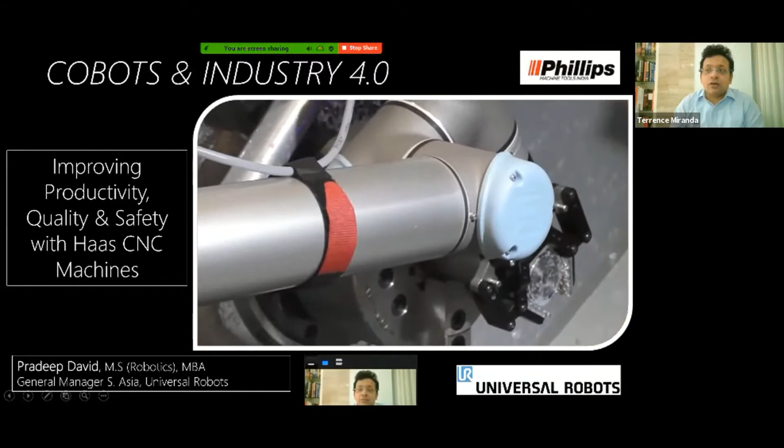Today, more than ever before, it's all about the competitive edge. Phillips, through our automation division, and Universal Robots, through their path-breaking collaborative robot technology, have come together in the Indian market to provide cost-effective, flexible, and safe automation solutions for a wide range of CNC machine tending tasks. As we all know, the present pandemic has revolutionized the manner in which CNC machining is looked at globally. India is certainly no exception. Machine shops worldwide are looking at innovative ways to automate and simplify processes. This is exactly what Cobots do, and Universal Robots exemplifies this. Simplify, automate, work collaboratively with CNC machine operators to increase efficiency and promote workplace safety. This is really the big difference today.

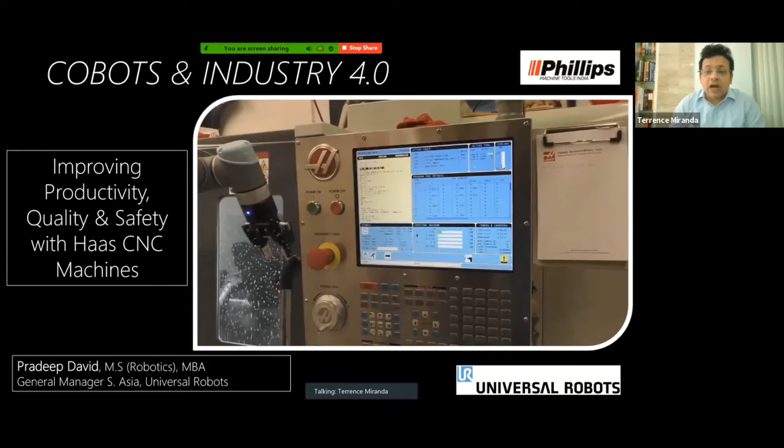Cobots put the power of automation and customization in the hands of the customer, just like the introduction of CNC did several years ago. We will now play a brief introductory video to Haas in India, the way our customers see us, and we will then proceed to the informative and technical UR presentation by Pradeep David. Thank you.

Haas has played an important role in achieving our goals. We are now confident and we can deliver the components to our customers with a tolerance accuracy of less than 10 microns. Haas gives us that edge over others to meet the requirements of the customer on time, every time. With the help of the Haas machines, we have been able to achieve the accuracy level of 10 microns.

Every successful industry needs a trustworthy partner, and for us, Haas is one of them. Anyone can sell you a machine, but I've never seen a company so committed to training you on it and ensuring that you're running it properly as Haas. We want a trusted partner in terms of who will take care of our machining requirements, and that is how we have been connected with Haas. We are very happy with Haas machines, and thank you so much for supporting us as a good partner.

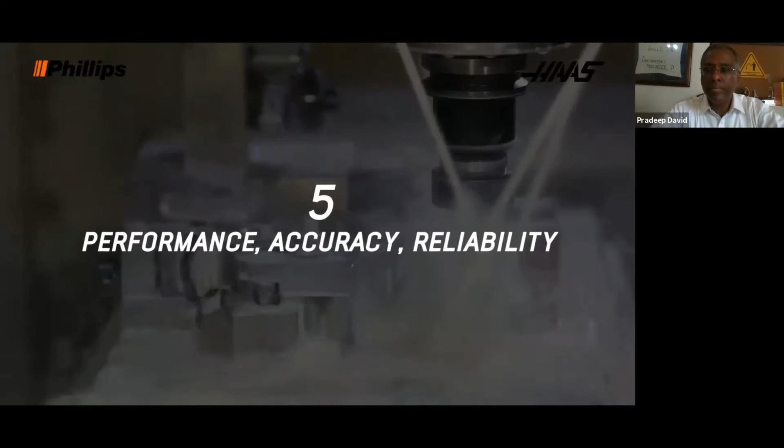On Haas machines, we cut titanium material and PEEK material, which is usually very hard to cut, but on Haas, we don't face any problems. One of the things we've seen is that Haas is a pretty reliable machine to run even these small cutters. It runs pretty smooth, we don't have quality issues, and it just shows you the integral build of the machine itself is very good.

Even I'm surprised that for an application which is as crucial, as critical, and as tough as graphite, we could run the machine for almost 10 years without any major repairs or refurbishment. Life, as well as the consistency and minimum maintenance breakdown, is the main characteristic of the machine tools.

Haas machines come up with very innovative ideas. The other good thing about Haas is that they have not stopped innovating. They have always worked on better equipment, better feed rates, better spindle designs, integral spindles now. So that has really helped us increase our productivity over the years. One more aspect about Haas is that you can even add a robot to run the machine. They are offering auto door opening facility anytime in the future as per your requirement.

We bought the Haas machines because of very good quality to price ratio. Considering the performance and cost wise, we came to the conclusion that Haas machines are better machines.

Haas is being instrumental in producing good quality products for OEM.

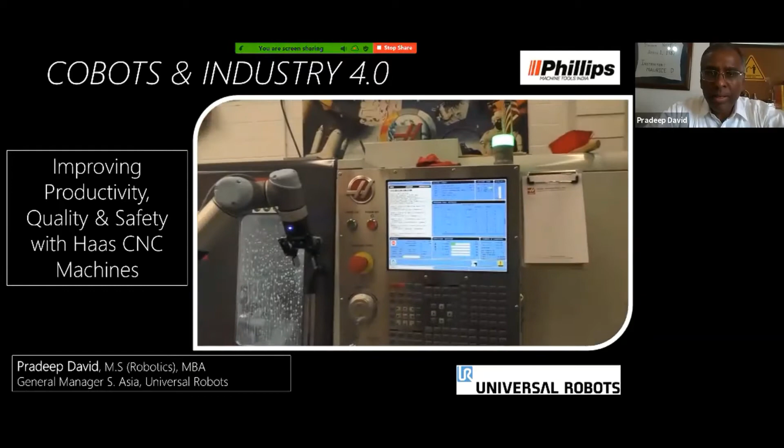So I think you see from this inauguration screen what we're all about. This is nothing but a human arm which can load and unload your parts very accurately. We have about 10,000 of these devices around the globe on machine tending applications, in other words, loading and unloading CNC machines. So by far, our number one application.

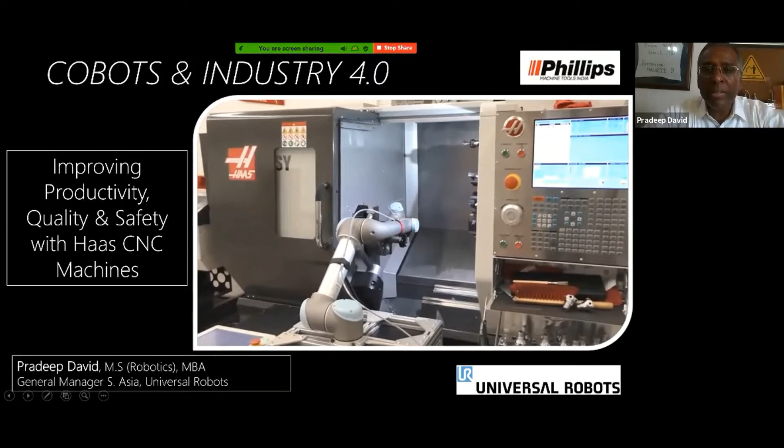Universal Robots is a Danish company. I represent the India operations. We've been here since 2016, that's when we started in India. The company itself is about 10 years old, and we are the leaders.

Now, since COVID is the big topic of today, let's just get that out of the way. While we talk about machine tending, it's also important to understand that what we have here is just an arm. Imagine it like a human arm, or your operator had a third arm. What could it do? In Singapore, they've used this arm with a dispensing machine, and it goes around a hospital spraying and keeping it clean. In Denmark, you see it's actually doing throat swabs. Instead of having a human being, and this guy potentially COVID infected coughing into the face of the doctor, we have actual tactile feedback at the end of this arm, and it can very delicately go and pick up the sample from the back of your throat.

And so that's another example. Some people are using it with a UV wand and an AGV, so it can actually be put on a mobile device. Let's say a particular workstation, or a factory had a COVID attack, one particular operator had COVID. Now what do you do? We see that in many factories in India now, I'm hearing in Gurgaon some large factories have got COVID infections, we've seen it in the newspaper with Bajaj, for example. So you would send a device like this with a UV wand, and it would actually sanitize that entire place without any human contact.

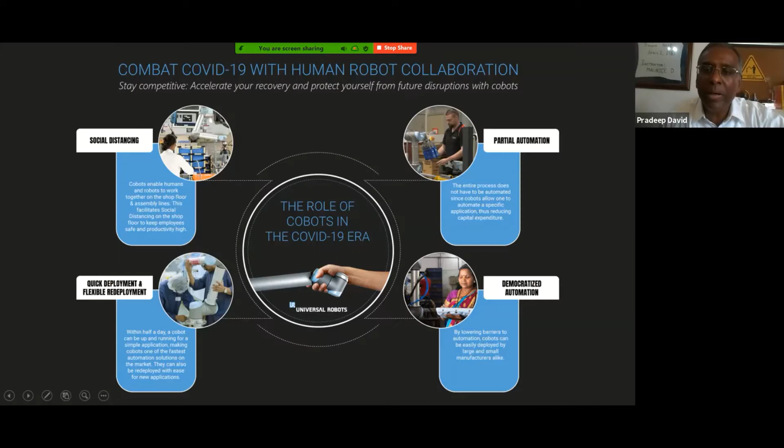Democratized automation. You look at the lady who's now programming the Cobot. This happens to be in Pune. And she doesn't look like a robot programmer or anything like that, right? She's just a regular operator on the shop floor. So the concept here is, if you know how to program your cell phone, you know how to do WhatsApp, and just about every Indian is an expert in WhatsApp today, right? So we can teach that person how to program a collaborative robot. I'm going to show you an example today as we go along.

Finally, there's a concept of partial automation. You notice that a human being and a robot are working close together, there's no fencing. In this case, it's bottling. And I know you're all CNC manufacturers, CNC users, so this may not be relevant to you, but think about it. I don't have to put a fence around it. So if I've got space limitations in my factory, notice that the human and robot can work safely right next to each other. These are some of the value propositions.

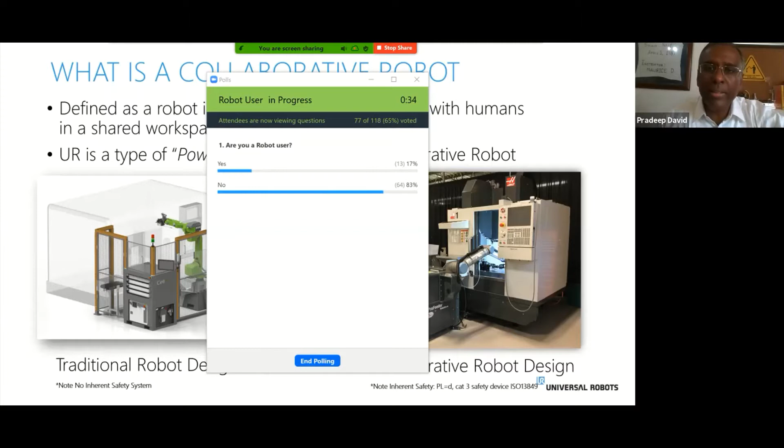So it says actually that 17% are users of robots. So today you probably use robots. My general impression of this would be that you're using industrial robots, not Cobots, because Cobots are fairly new. And a whopping 83%, okay, so let's say 80-20, the 80-20 rule has worked in this poll. 80% are not using robots or Cobots. So it's a great session you're attending. Hopefully we'll be able to help those who are not using Cobots and see how this can be valuable to you. Okay, moving on to the next slide.

So once again, industrial robot on the left, collaborative robot on the right. Very similar to the previous picture. You notice there's a huge fence around this. So once again, if you happen to be an SME or MSME, most probably your shop floor space is limited. You do not have the luxury of putting a big fence around every robot, every machine, and using up that space. Okay, space is very expensive in India, and it's prime, right?

However, you notice the Cobot like this, put on a little trolley. He moves it from one CNC machine to another, and so let's say that particular Haas machine today, you've got a huge amount of orders. I can move the Cobot to that machine and load and unload. And maybe at the end of this week, I'm done with the orders on that machine, but I need to move it to a different machine. I just take it on this trolley, put a little locating pin on the floor, and choose the right program, and I'm off and running, okay?

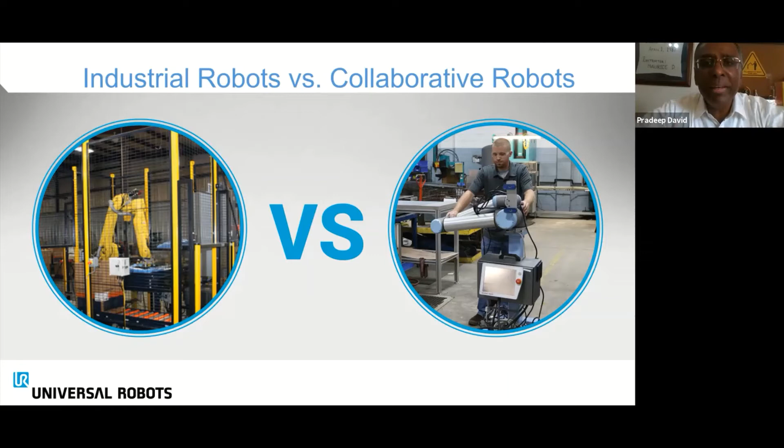Think of a Cobot as a tool. Please don't get this mind block that, I'm putting in a robot, how the heck am I going to maintain it, my people are very simple. No problem, you can maintain it, and I'll show you how.

If you're interested in the technical specification, it's about a book that thick - you can go online, ISO technical specification 15066, 2016. That's when it was ratified, which basically allows a Cobot and a human to work together in the same space. I won't go through the details, it's very thick, but if you're interested it's all there. 17 safety functions, EN ISO 13849, category 3 PLD, certified by TUV Nord.

So many of you I know have export orders, and your customers require you to have certain levels of automation, right? I know Bosch, for example - we have an MSME in Pune supplying parts to Bosch, and Bosch has said you better get Industry 4.0 ready, and I want you using things like Cobots which are Industry 4.0 compliant, to show that you're meeting the required standards for automation in the future. Keep your plants future ready.

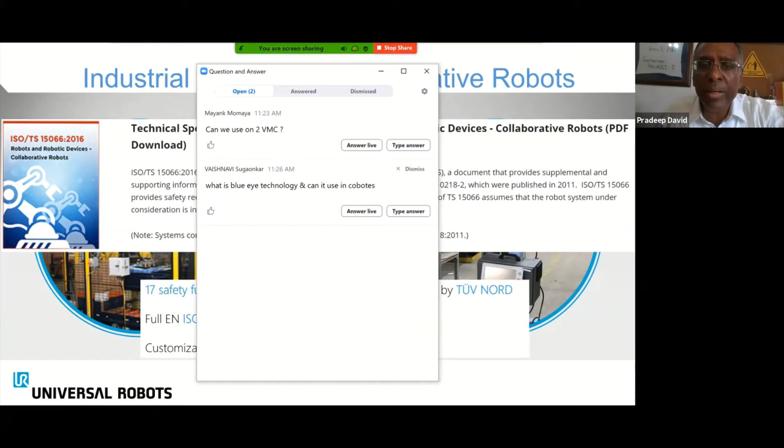What is Blue Eye technology and can it be used in Cobots? I'm not very familiar, sir, with what you're asking about Blue Eye technology. If you don't mind detailing that - maybe I said something and you caught it as Blue Eye, but I'm not 100% sure what you're asking. Anyway, feel free to keep asking your questions, Akash, who's online, will also be able to answer them as we go along.

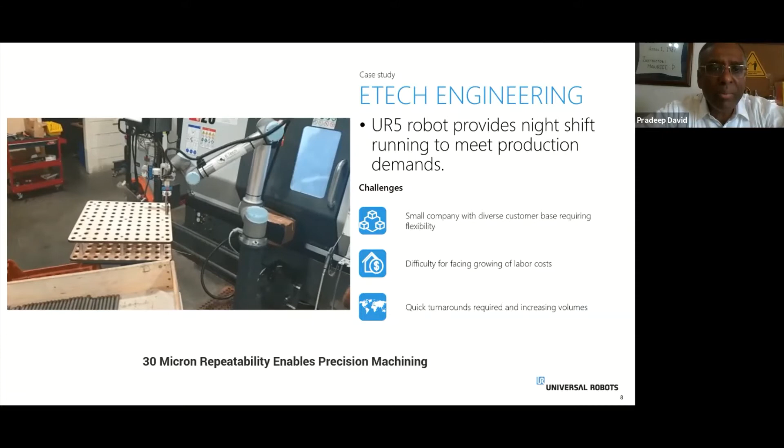So we have a Haas machine, we have a robot, a Cobot rather, collaborative robot. It's got these parts - it's going to the input tray, picking up, it looks like some kind of pipe and/or bar metal stock, something like that. And it's putting it on that machine. Not sure what it's doing there, but gauging or something is happening there.

Then it's coming to the Haas machine and waiting for the door to open, and now it loads the machine into the chuck. By the way, 30 micron accuracy is possible with a UR5E - I'll explain these categories shortly. And why is there a Y-shaped, why are there 2 grippers? Because one gripper is pulling out the part that's machined and the other gripper is actually loading the part. So you save a little bit of time, right, your cycle time is enhanced. That's why you have two grippers.

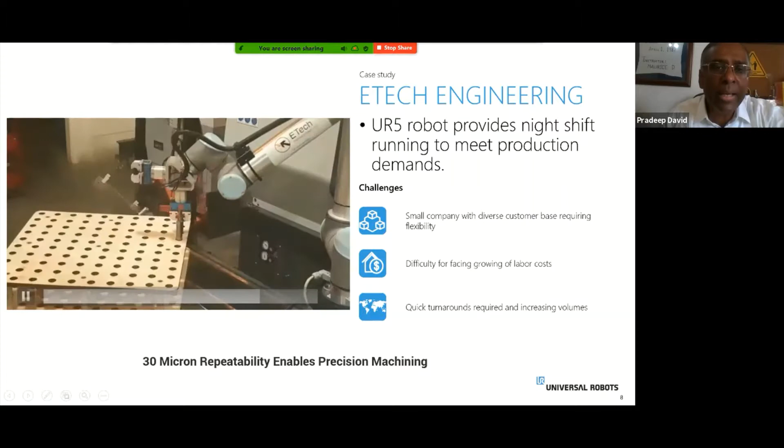Okay, so once again, it's picking up that stock, putting it to that gauging station or whatever station that is - some operation is happening there. And it now brings it to the Haas machine.

And there it goes. It puts in the raw stock, pulls out the robot, and starts the machine. This is done by E-Tech Engineering, using a UR5. In this case, it's 100 micron accuracy, not 30 micron.

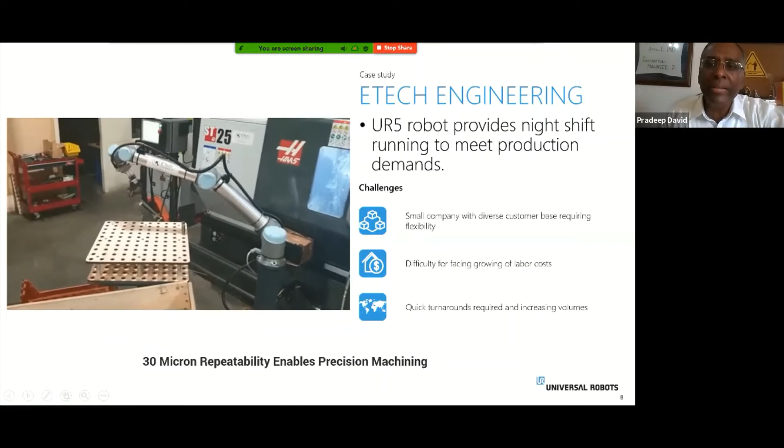30 micron is with a UR5E. Just to be clear, this is my mistake, but a UR5 will give you 100 micron repeatability, whereas a UR5E will give you 30 micron accuracy.

So they had a problem with night shift running, maybe you also have this problem. You don't have operators at night, so you can come fill up the input tray, and this machine is going to be making parts right through the night. When you come in the morning, your output tray is all filled, and you can start filling this tray up for the Cobot once again.

So, a small company with a diverse customer base requiring flexibility, and difficulty facing growing labor costs. In fact, I would say unavailability of skilled labor nowadays. In our situation, a lot of labor has gone home and God knows when they'll come back. Quick turnarounds required and increased volume. These were the kind of things we were addressing at this particular customer location. Simple case study. We'll take a look at a few more as we go along.

Many of you, I see 100+ people have attended, so maybe you've read articles in the press about a silent Cobot revolution brewing in Indian workshops. Why is this happening? Why is this technology so popular? Let's try and understand that.

So let's take a look at this particular video at Ahmedabad.

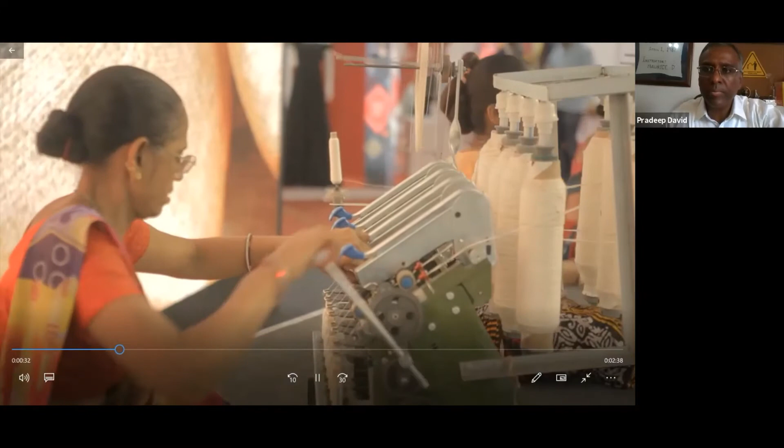Welcome to Ahmedabad, India's fastest growing city. This small city is home to some of India's biggest textile manufacturers, an industry established here as early as the 19th century. The entrepreneurship talent here was able to bring mechanized manufacturing almost 140 years ago. I am Ashish Nagarsheth, Managing Director with SMEW Textile Machinery Private Limited. We are a textile machine manufacturer based in Ahmedabad, India. SMEW was started in 1958 and it's been our family business since then. We make textile winding machines. Our main product is the soft package winding machine, the rewinding machine, and some customized machines for winding as well. We've gone from MSME to SME, a small and medium scale enterprise, from a micro scale enterprise.

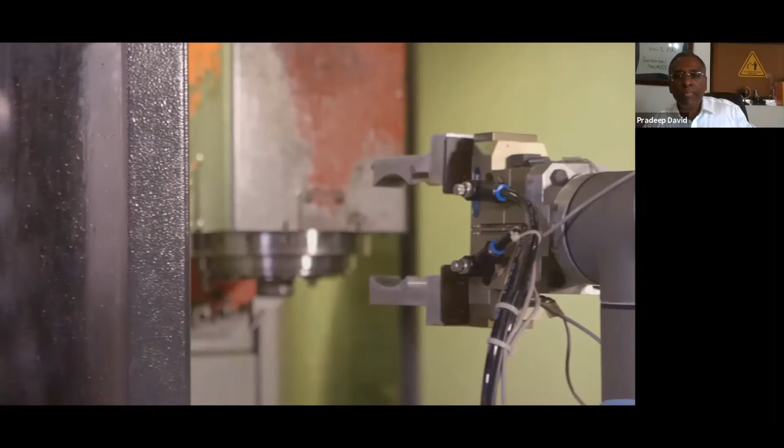In January 2017, SMEW Machinery decided to purchase and deploy the UR10 Cobot by Universal Robots. A universal robot with its simplicity and non-fencing requirement met our requirements specifically for this machine. The UR10 robot is basically... our operators find it very easy to use, as far as operator friendliness is concerned.

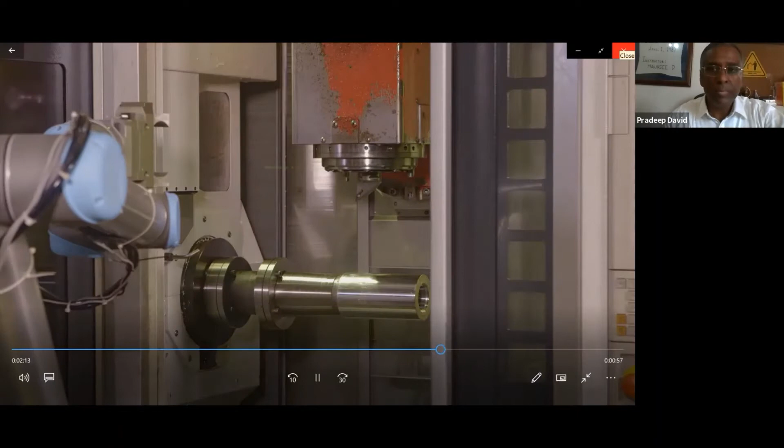The advantage with this application for us is that we are able to run the machine for much longer hours than we would using human labor. Before the robot was installed, we were making about 30 pieces a week. Now we are able to go from 30 pieces to almost 80 to 90 pieces per week, a jump of almost 3 times. It's been very good for us because the return on investment is less than 12 months. We hope to have a long-term relationship with Universal Robots and look forward to investing in more robots in the future, working along with them together.

Just like Ashish at SMEW Machinery, many more small and medium-scale enterprises are choosing Universal Robots Cobots as an affordable solution to take their operations to the next big milestone.

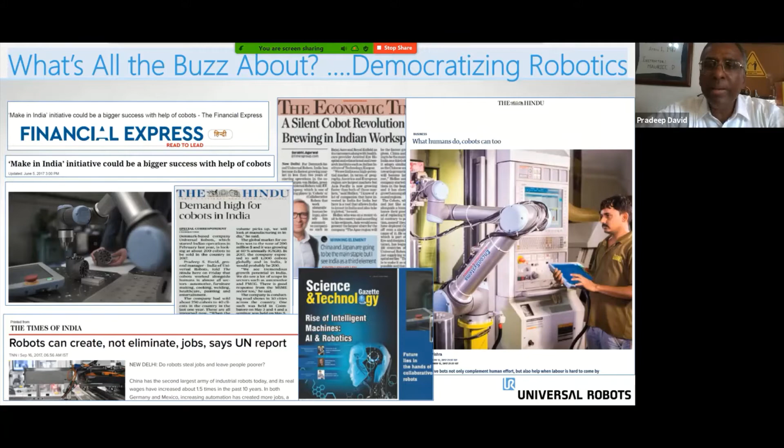So I think you saw a very happy MSME user there that is not so dependent on his operators anymore. One important point here is this is a study done by Frost and Sullivan. The reason you're attending this seminar is obviously to get more new technology into your plants. You've all heard of 5G, AI, and deep learning. But in advanced manufacturing, you're all in manufacturing, you've got CNC machines, Haas machines — automation is the way to go.

We'll show you the benefits now of cobots. Number one, it is Industry 4.0 compliant. So if you are supplying to a large MNC or you're exporting, I'm sure your end user, your customer, is going to insist on Industry 4.0 compliance in your manufacturing.

I'm not going to go through the definition of Industry 4.0, it's a very large definition with 26 different levers. But the important one we're going to focus on is human-robot collaboration. It's important enough in the definition of Industry 4.0 to have its own category. People understand that humans and robots, when they work together, give you a huge new capability that just humans alone or just robots alone never could give you.

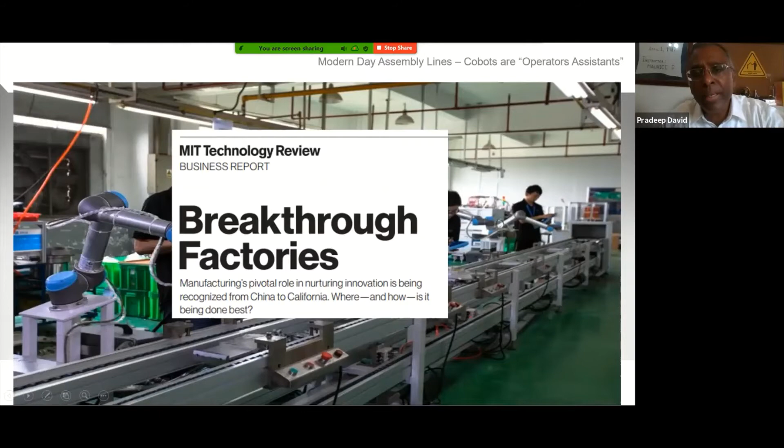There's a study done by MIT, the Massachusetts Institute of Technology in Boston. This is not a marketing gimmick, it's a technical study done by a very well-reputed global university. The experiment was done at a BMW factory in the US, and the result was they found an 85% reduction in workers' idle time when they collaborate with robots. So people found a dramatic improvement in productivity when humans and robots work together, as opposed to humans alone or robots alone. This was a huge finding, and we are now seeing the benefits of that.

So let's take a look at the benefits you get with a collaborative robot. Number one, you just plug it into the wall, single phase power like I have in my house right now. It's self-maintenance, I don't really need somebody coming in and changing the oil. There's no oil to change, right?

There's no grease to change, because I know 20% of you who have robots probably have an AMC from the robot company coming in and changing the oil or the grease, recalibrating, changing the battery. There's no such maintenance required.

Yes, there is self-maintenance required. In other words, I need to clean it down. If there's a lot of oil mist on this, I need to wipe it down. There's a control box, if there's a fan on there and it gets clogged, you're not going to get cooling. So make sure these kinds of very basic self-maintenance tasks are done. I want to make sure the mounting bolts haven't gotten loose, either on the end of arm tooling or the robot itself.

It's very easy to program, in less than half an hour you can get it programmed. I'll show you how. Every axis, this is a 6th degree of freedom like a human arm - you've got the base joint that moves, the shoulder, the elbow, and the 3 axes at the end, the wrist if you would. Each axis can go plus or minus 360 degrees. Go and check out an industrial robot spec, nobody will have this, where every axis can go plus or minus 360.

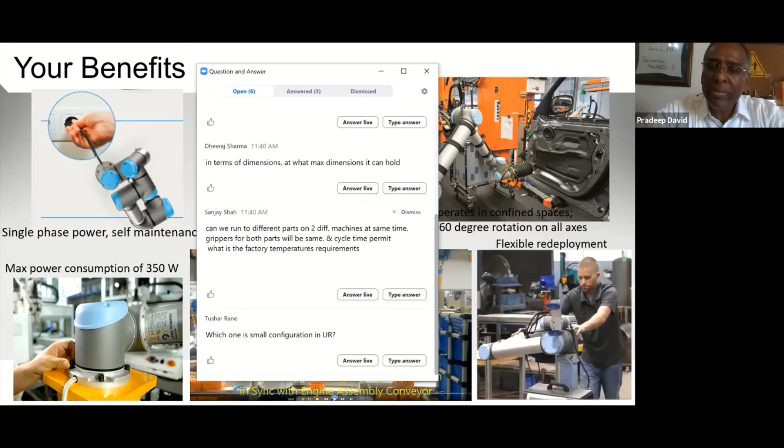When I say a robot is safe, a Cobot is safe, I've got all the technology built in so that if an operator accidentally comes into contact with it, it's not going to hurt him. I'm going to show you an example of that too.

However, what happens if you decide to put a knife in the hand of the robot? How safe is that going to be? Nobody's going to put a knife in the hand of the robot, but maybe your part has a lot of sharp edges. That's got nothing to do with the robot itself - maybe it's your part, or maybe it's your end effector tool, that could damage or hurt the operator.

In that case, we have certain tricks we can do, like pointing the wrist in an inward direction so the part is not exposed to the operator. So it's very important, when we say it's safe, to do a risk assessment of your entire application. Just because the Cobot itself is safe doesn't mean your application is safe - maybe you have a pinch point in your conveyor, we need to look into that. Maybe you have a point of collision with a sharp object, which could be tooling you're using elsewhere. So it's always important to assess the entire application, not just the Cobot alone.

So I hope I answered your question. It's not foolproof, but through a risk assessment of your project, we can make sure that it's totally safe. By the way, there's about

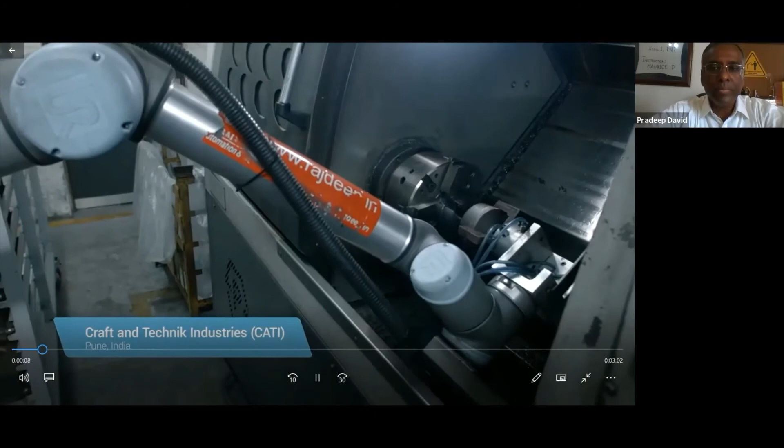I said to my father that I need some capital. He said, 'Why do you need money?' I said, 'I want to start a business.'

Craft and Technik Industries basically manufactures precision components, mainly for the automobile industry. And today in 2018, I'm proud to say that we are almost 70% export.

Overall in India, we talk about unemployment, but the true fact for the majority of the SME sector is that they don't get people. I can bring about 100 SME people who will tell the same thing.

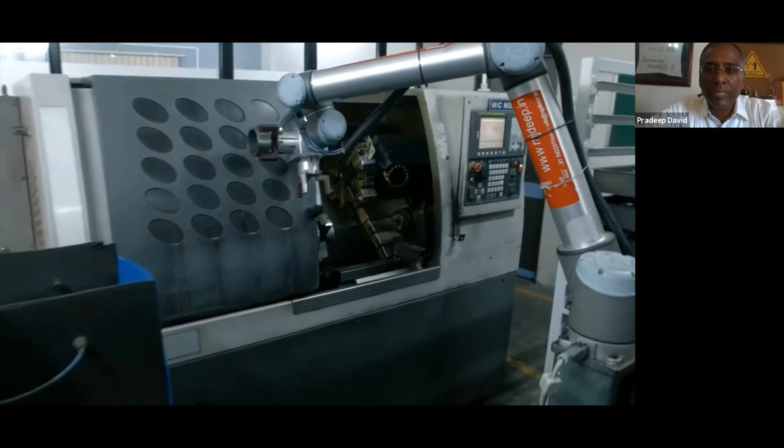So the best combination, I told them that we want to have robots. Instead of investing in 5 CNCs, invest in 4 CNCs and buy 1 robot. If not individually as a robot, but 4 machines and 1 robot put together as 5, the payback period will be faster. I visited Japan, where there are robots working at the same time on the assembly line.

Now the problem there is that the entire assembly line is fenced and nobody can get in. Collaborative robots was one very important point going ahead with Universal, because we have a lot of operators working on the shop floor and we did not want to seclude an area just because there was robotic operations there.

The components that we are manufacturing range from about a kg to maybe about 5 kgs in weight. And when I checked different robots available in the market, Universal Robot definitely topped that list. The UR10 could lift up to 10 kgs in weight.

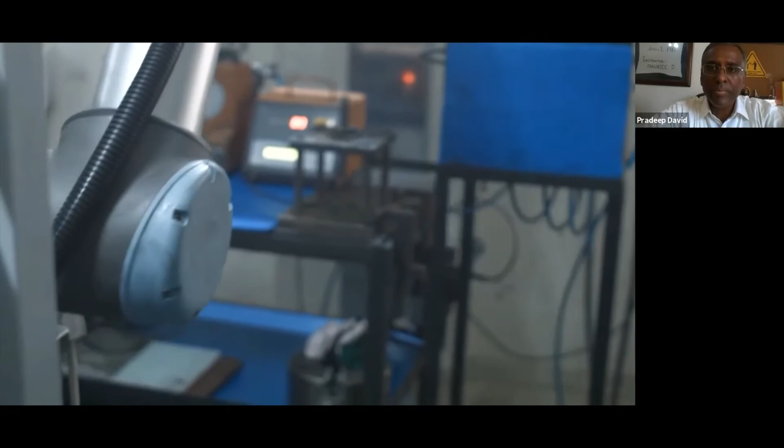The robot completes all of its auxiliary operations in the exact time that it requires for the second machine to finish its operations.

Initially, we got about 15% increase in production, and I'm pretty sure that we will be achieving 30% increase in production. We've introduced auto inspection on the robot.

So the robot actually places the component onto an inspection fixture, takes feedback from that fixture, and then decides whether the part is okay or not. So our customer is rest assured that none of the parts going to him are defective.

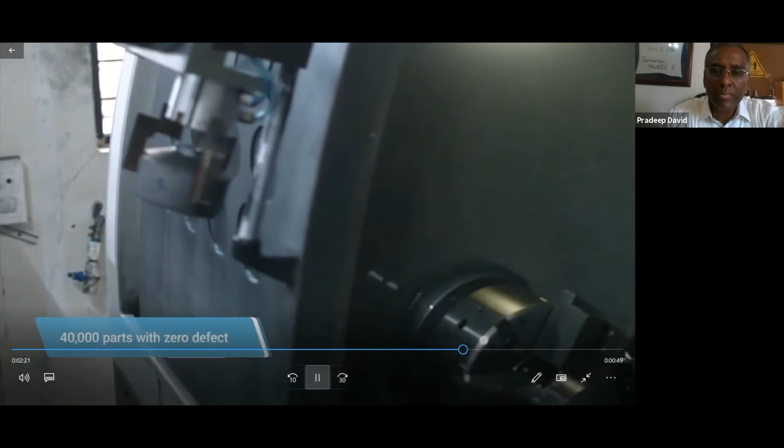Now 40,000 parts have been machined by the robot. Those 40,000 have already reached the customer. I have not faced any kind of rejections at the customer end.

I'll just stop the video for a second here. There was a question: can 2 VMCs be handled? So you see here, the Cobot is in the middle, mounted on a pedestal, and within reach of both sides it's got 2 machines. This is a very common application where we have 2 CNC machines being tended by 1 robot.

We need to have at least 10 robots. That is my foresight. I'm quite hopeful that we should be able to achieve that.

I would call on my fraternity of SMEs that, boss, come on, the time has come that SMEs should also be all automated. It's not the prerogative only of large scale industry that they have robots. Those who can afford to run VMCs and CNC lathes, they don't have to think about payback period.

Robot is just a block within your mind. You have to remove that block and take a decision and go ahead with investment. And it will definitely improve your operations.

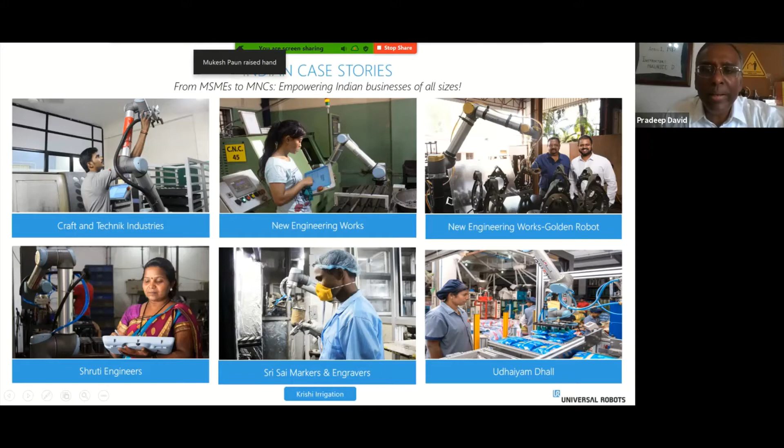So once we put this Universal Robot into production, it's been hardly 2 months. And what we have observed is we are getting a better quality product. The rate of rejections or rework has reduced drastically.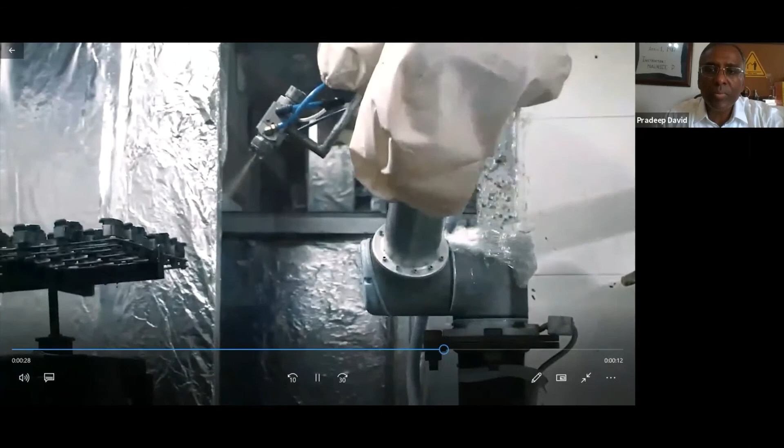Furthermore, we intend to increase productivity also. What we were doing, let's say if we were doing X quantity previously with manual interface, now we are doing X plus 2 with the robot even running at 50% of the speed. So in a couple of months' time we'll increase the speed, and then of course we'll go almost 1.5 times what we were getting previously with the human interface.

So that was a quick example of painting. We have several more. And one last example of an Indian SME using it. Now take a look at the factory. You will see that this is a very small factory, and yet the lady who's programming it is just a regular operator. Take a look at this last video.

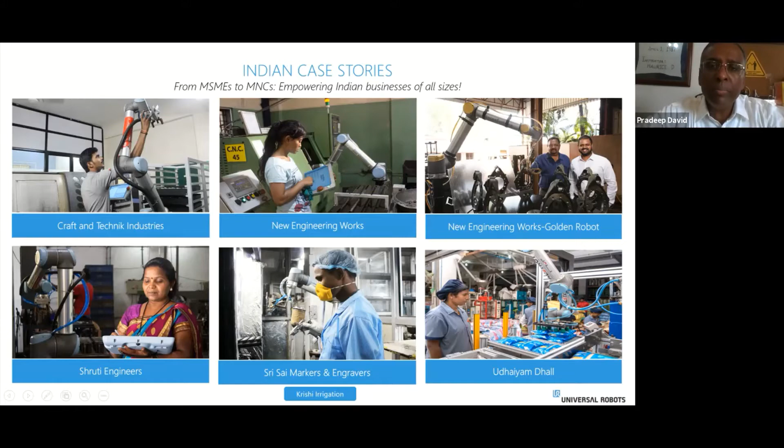So very powerful reasons to start using this technology. So I would suggest talk to your Phillips salesperson. They can get you started on this journey very quickly.

Okay, so what are the business benefits you as an MSME get using Cobots? Number one, you get increased capacity. Your quality goes up, you saw that in the Catty video. He had 0 defects on his parts, 40-something thousand parts that he had sent. You have a constant throughput.

Are you worried about your labor? After Diwali, I don't know how much labor comes back. You're always worried about your labor, correct? Somebody's sick, somebody got COVID. So constant throughput when you have something like a Cobot loading and unloading your machine.

24/7 operation, so increased uptime. Reduced footprint, and this is a very important one. Many of us have problems with the amount of space we have.

I just saw the question, can we handle 2 machines with 1 robot? Probably you have space limitations. We have many guys in India, SMEs, handling 2 machines with 1 Cobot in between. Plus their operators are able to go in between because there's no fencing, to service the machine or do other manual operations.

So very important one, less than 1 year payback, that's a little bit questionable. You've seen a couple of examples of 1 year payback like the SMEW video I showed you, but that may not always be the case. It may take you 2 years. If you decide to use it in multiple applications, it may take you 6 months, so this is variable.

Easy to move and fast to redeploy in low volume, high mix production environments. And you empower your workers, you make your factory now an attractive place to work. You've got Cobots, so your workers are not dealing with monotonous, dull jobs. You're actually upskilling your labor. You're making your factory a much more attractive place to work in. It won't be hard for you to keep your labor happy.

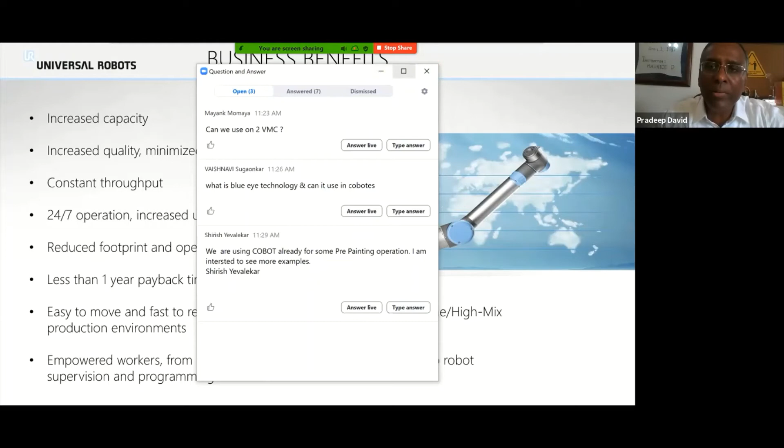So okay, let's look at a quick ROI calculation. Remember, I showed you a couple of pictures here, for example this one, New Engineering Works, a company in Jamshedpur, an SME using about 7 robots. Now we don't have time to show the video, but I'll show you the ROI calculation.

Okay, so his calculation, he has CNC machines. For 3 machines, 3 shifts, 10,000 rupees a month times 12 months, and an increase of 10% per annum. This is in Jamshedpur, he's making commercial vehicle parts for Tata. So his cost for the first year is about 10 lakhs, 12 lakhs for the second year, 13 lakhs for the third year. The project we suggested to him cost 30 lakhs.

This is with a robot and with some input and output conveyors, some tooling, all kinds of things for about 30 lakhs, to automate his machine using, I think it was UR5s if I'm not mistaken, 5 kg payload. He had to take a loan for 30 lakhs. And his cost now, this would have been his cost had he gone with manual, but now his cost is 30 lakhs times 15% interest on the loan, which is 4 lakhs 50,000. And then the non-cash expenditure, the depreciation he has calculated at 15%, which is another 4 lakh 50,000.

So his current expense was 10 lakh 80,000. With this 30 lakh investment for the robot, his investment is only 9 lakhs, as he goes on for every year. In fact, we did some calculation on his productivity because with workers he used to get 21 hours, now he gets 23 hours of productivity, but his quality went up a little bit. When we did this calculation, in the first year his return was 10 lakhs, in the second year 12 lakhs, in the third year 13.8 lakhs. So ROI was about 2.5 years in this particular case.

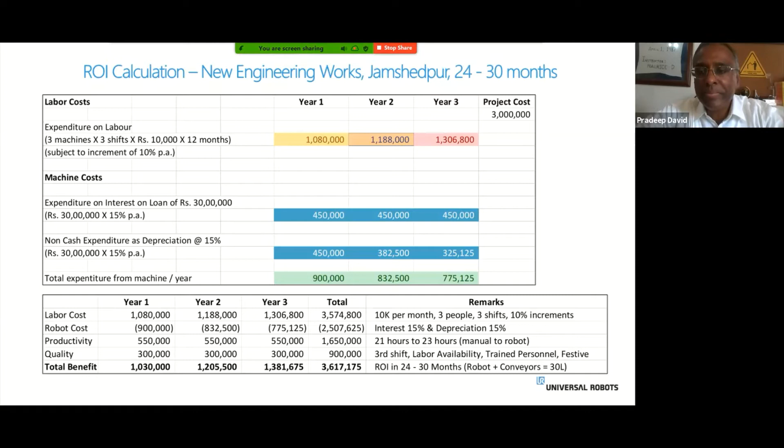Okay, so moving on. What can cobots be used for? Somebody asked, can you use it for painting? Absolutely, yes. We are focusing on machine tending today, but a cobot can be used for lab analysis. We're using it for many COVID cases in labs today. Innovative. If you have innovative engineers in your factory, smart guys, make them look at a cobot as a tool. Don't make them think of a cobot as a robot that's fixed and only doing machine tending. Think of it as a tool, like you think of your drill as a tool.

I can move it to where I want and solve a particular problem. For example, I may have some screw driving needs, a huge order of 300 so many parts and I need all the screw driving done. I can move my existing cobot from the machine tending application, use it for screw driving, and then take it back. By the way, we have people making omelets, dosas, and all kinds of things with robots, or bartending. That's a different application you can use it for. Hundreds of applications on the web if you want to see that.

Pick and place is one of the most common applications. Assembly, if I want to put parts together. Quality inspection is very, very common nowadays. For example, at Maruti they put a camera at the end of the robot, and as the final car moves out of the assembly line it takes about 128 pictures. The robot moves it to different locations - is the radiator cap on, is this thing tightened properly, is that thing in place. All that is done. If all those things pass, then it's sent out. So inspection is another big one.

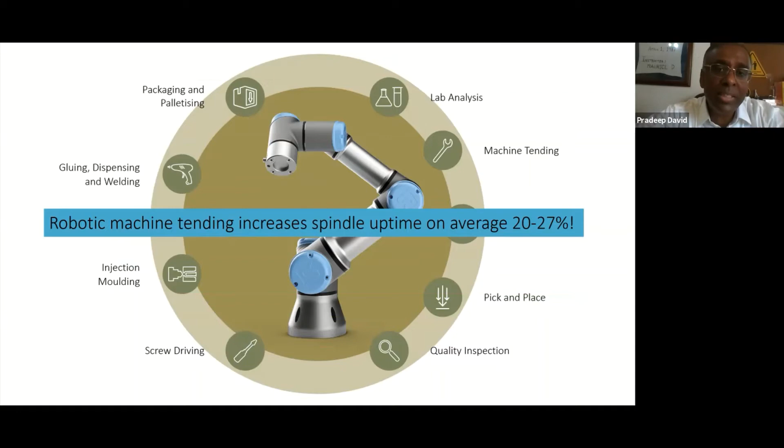For machine tending, robotic machine tending increases spindle uptime by an average of 20 to 27%. This is based on our experience - we've done about 10,000 cobots on CNC machines around the globe. So anywhere from 20 to 27% spindle uptime can be expected.

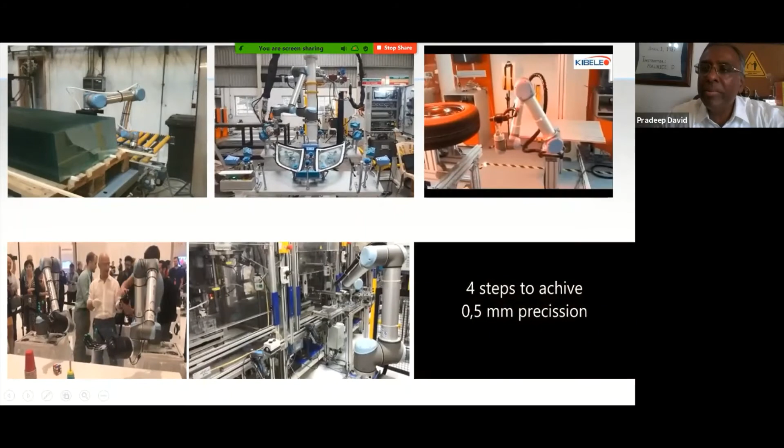I'm just very quickly showing you the different types of applications. On the top left is just doing a pick and place application of glass. On the top middle you can see this is the glue dispensing application, very accurately loaded dispensing glue. On the top right you can see an inspection application where a camera is moved, let's say from the sidewall of the tire to the tread of the tire to the other sidewall, and then when this tire is removed, similar to your CNC machines, you can have two inspection stations.

So the cobot swings over to the other side while the operator loads the new tire.

Bottom left, you can see somebody no less than Jeff Bezos, the richest man in the world. He's playing with our cobots with a haptic glove. So if you're handling radioactive material or a COVID patient far away, you don't want to be directly involved. That's how you can use haptics to do this. It's a very innovative product.

Bottom middle is Bosch, who has published this on the web. They're making diesel injection parts, going from part to part. Various cobots are loading and unloading for leak testing and stuff.

Bottom right, you can see a cobot sitting on an AGV at an Airbus plant where it's actually got a camera. It's from the DWG drawing, the AutoCAD drawing of the wing. It locates the side of the wing, then goes from the screw hopper, picks up the screws, and does the screwing automatically.

So from very simple applications that an MSME can use, to very complex applications used by people like Boeing and NASA - the whole spectrum can be done by cobots.

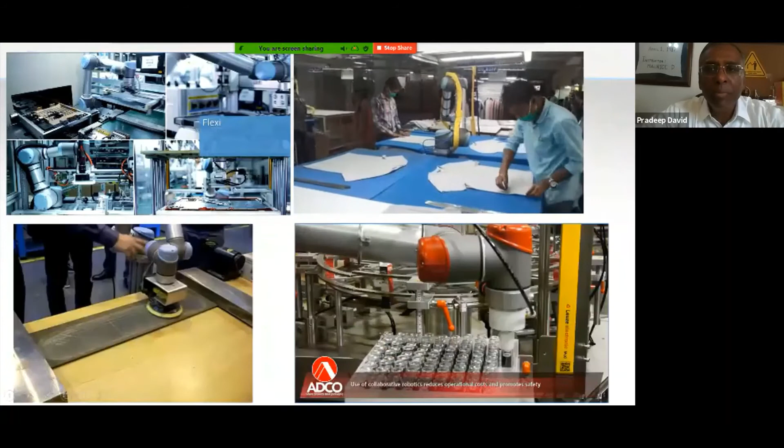Here are some more applications. You can see a steam iron being used to do the pressing application while the operator, a human and robot, work together. The robot cannot do this folding - a human being is very smart. Whereas this drudgery of carrying a hot iron and doing the pressing, the robot is doing. So in this 4-station setup, very effectively, let the robot do what it's good at, let the human being do what he's good at. Human and robot working together hand in hand.

Here's a polishing application. On top left, they're actually making laptops, so pick and place - just many, many applications.

So we'll get back now to machine tending, which is your focus. What kind of cobots do we have, and what are my choices?

We have a UR3, which is a 3-kilogram payload - it can carry 3 kilograms, meaning the end of arm tooling plus your part has to be less than 3 kgs. So let's say I'm using 2 grippers - one to pick up the unmachined part and one for the machined part. That gripper itself weighs 1 to 1.5 kgs. Now I only have 1.5 kg of payload I can pick up because the total weight is 3. And the working radius is 0.5 meter - from this center point to the radius, the maximum extension is 0.5 meter.

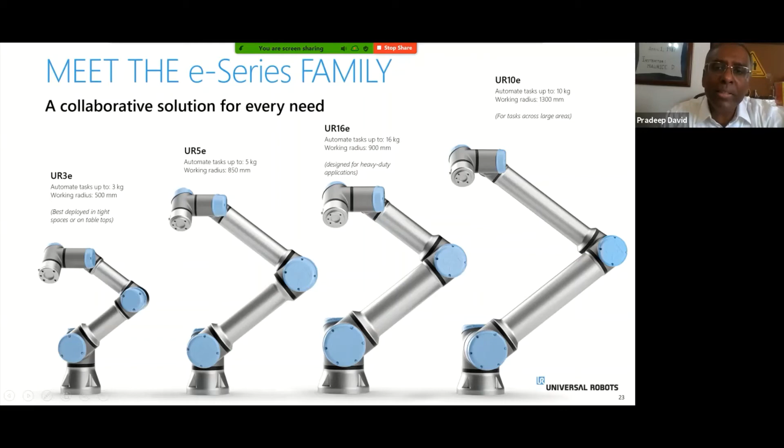Let's now take a look at a few Haas examples. Because you all have Haas machines, I hope, here's an example of you tending some Haas machines.

So get the most out of your Haas machine with universal robots.

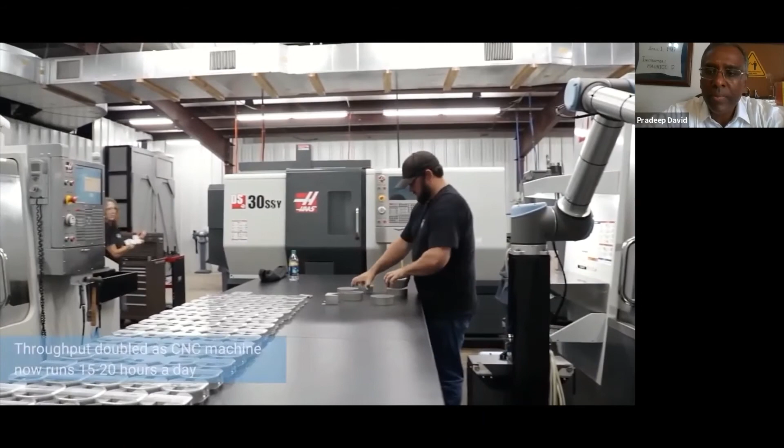Notice how elegantly it's mounted. A simple pedestal like this, just a box, a beam, and 4 screws, and it's mounted. Okay, 1 wire going out from there for power, and that's it.

Now the end of arm tooling, in this case, you can either make your own. In some cases, people make it to save costs. In some cases, you buy a ready-made gripper because you need adaptive gripper, you need force control. Sometimes you even need a gripper that will do the gauging while it's picking up. So there's a company that while you pick up your part, it will also do the gauging automatically. So your throughput goes up and the gauging happens automatically while it picks up the part.

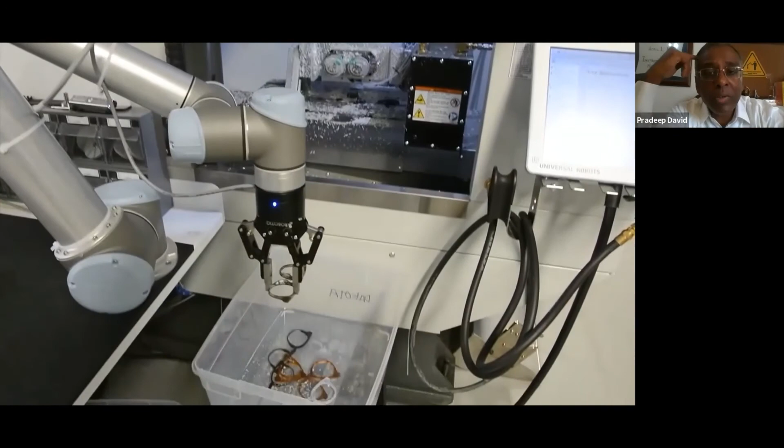Okay, so we have different types of grippers: 2-jaw gripper, 3-jaw gripper, adaptive grippers, force-sensitive grippers, collaborative grippers. There's just a whole different variety. Let us know what you're trying to do. We will help you select the right one. So get with your salesperson from Phillips, and we will be able to help you in the design of what you need end of arm. That's very, very critical to the success of the project.

Here, take a look. It is mounted on this little table, the robot. In some cases, the robot is actually machine mounted. You know, we can actually mount it right on the machine.

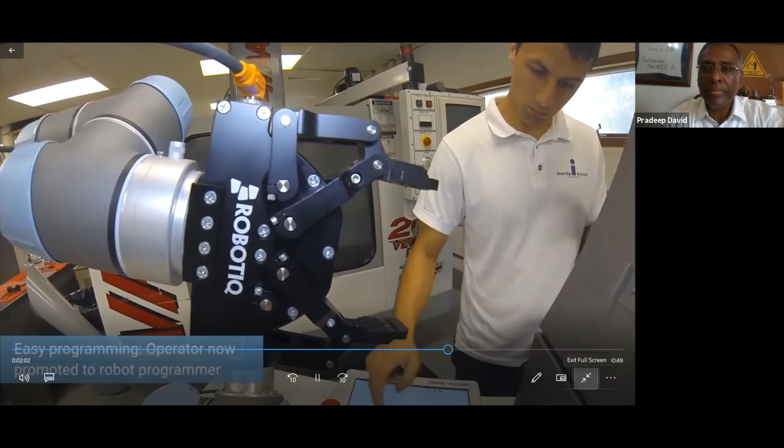Okay, I'll go to another one. Now we'll go to the Pro Feeder. 154 parts with the dual gripper.

I'll just turn the volume down for that. Now you can see the dual gripper at the end. One for the machined part, one for the unmachined part. So this is something typically that will run through the night on its own. And notice the number of tools up there. The robot can pick up a drill, it can pick up sometimes a welding gun, some different tools can be there to change the end of arm tooling.

I think in this case, they have 154 parts in the feeder here. So all this can be designed.

Get with Phillips once again, and what makes sense for you will be determined. Here's another example of a precision loading. 30 micron accuracy was needed for this one. And let's take a look at this video.

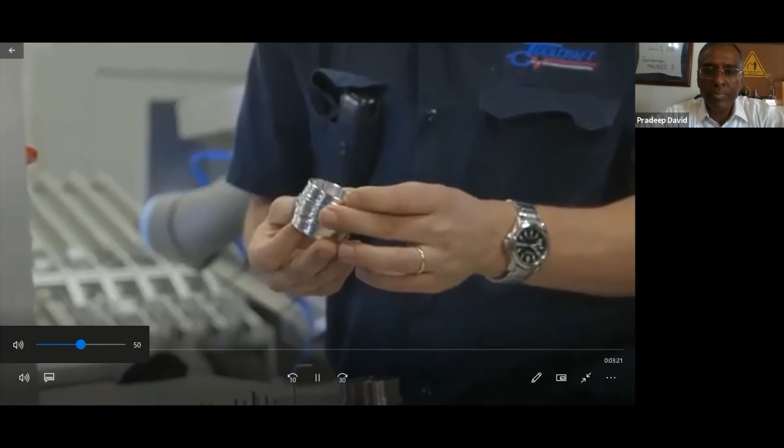Toolcraft in Seattle, Washington is a small machine shop manufacturing parts for aerospace, medical, and defense industries. When a larger order prompted the company to run production 24/7 by adding a 3rd shift, Toolcraft faced a challenge. Nobody wants to run on 3rd shift around here, but trying to hire for it, when you put an ad out, you're not getting very many responses. With unemployment at 3%, we decided to look at automating. We decided to go with the collaborative robot. I like the idea of our machinists being able to work alongside the robot, and that was pretty appealing, not having a safety cage in the way as you do with the industrial robots.

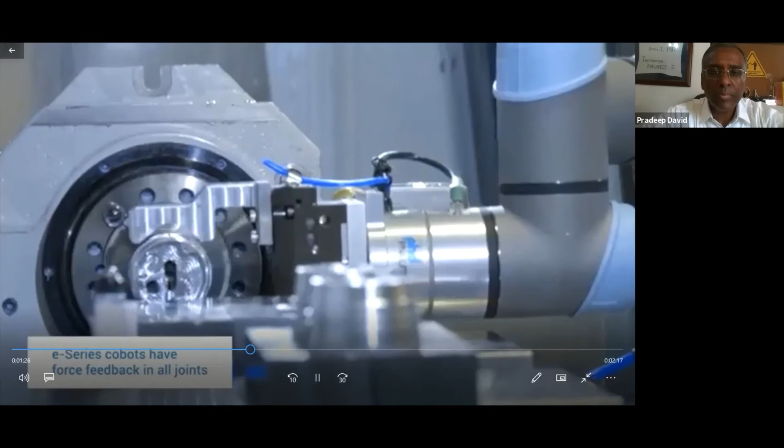When selecting a robot for a CNC machine tending application, precision is always a very big factor. And when we heard about the new E-Series that was coming out and heard that the repeatability of the UR5 specifically was down to 30 microns, we're very excited as that really competes in the same space as traditional industrial robots. So that was huge for us. The new E-Series robot acts like a human operator because it has force feedback available in all the joints. So we're able to force a part into a very tight, precise locating fixture, and we can force it in there and wiggle it and program that compliance very easily to enable basically a human touch with the robot.

And some of the benefits we've seen right off were an increased production. We're able to staff that third shift, and we went from producing 255 parts a week to 370 parts per week. Along with that, we're able to finish our year's production 7 weeks sooner, thus freeing up that machine to produce parts on other jobs. We're able to see a decrease in cost by 23%. We're going to be able to go and be more competitive on a lot of the long-term work that we have.

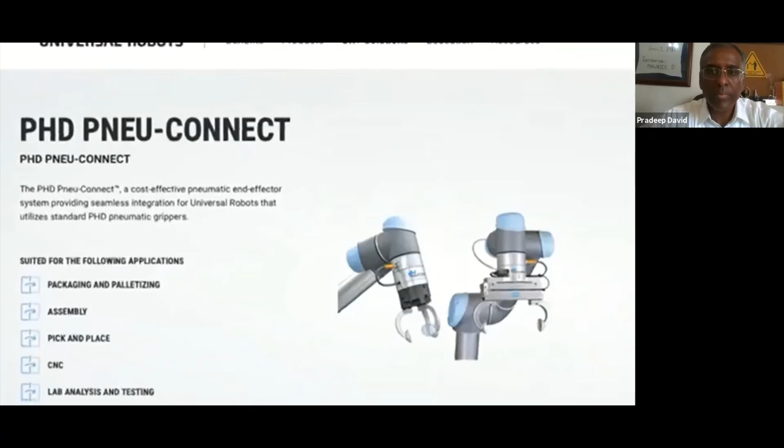We chose a Pneu-Connect pneumatic gripper for this application, and a big factor in that was the fact that the Pneu-Connect gripper is UR+ certified, meaning it's certified to work with the universal robot right out of the box.

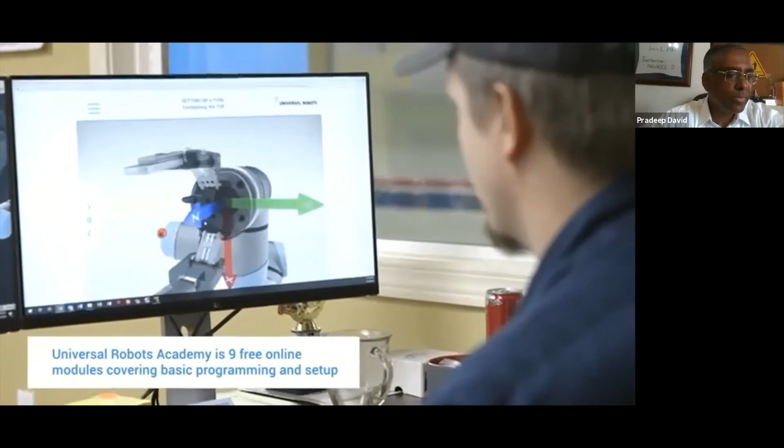We worked with an integrator who got us going on the first job, and he worked with our manufacturing engineer, Brian. Because Brian was able to work with Troy on the programming side for 1 or 2 hours, he was able to jump in and take off with programming Universal Robots. Universal Robots has an academy that Brian went through.

The UR Academy and the on-site training enabled Toolcraft to expand their cobot application with no external help, adding a rinsing station to the cycle. With the Universal Robot, it was neat to see how you can program offline. I was thinking production's going down, we're going to be down there for 6 hours while he's programming and setting up.

We were both pretty fired up on the support that Universal gave us to get that offline program up and rolling. We have one successful installation under our belt, and going forward I see us installing 1 robot per year. Brian's able to go in, troubleshoot, and get us back up on anything that comes up. Having that in-house is key.

The next one we're going to look at is to be able to tend a horizontal mill. I think we're up for the task. I really do.

I think the important part of that video is how the confidence grows internally once you do 1 or 2 projects yourself. Those guys understood that their existing people can easily program this.

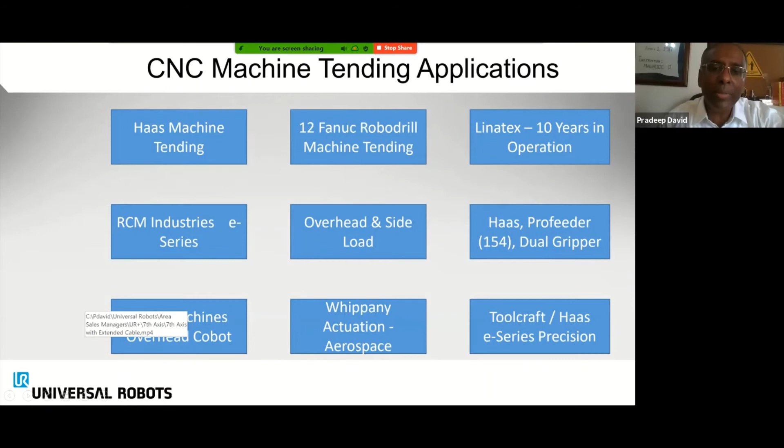One last one. Here's an example of some multiple Haas machines being tended with a cobot put on a gantry. This is when you have very large cycle times and you want to use 1 cobot for multiple machine tending. So if your cycle time permits, yes, this is possible. It's very lightweight, as you can see, and it can tend multiple machines.

So putting a cobot on a 7th axis, as we call it, is a fairly common thing that we see. Now, what are the benefits of machine tending that you can see?

Number 1, it loads raw parts, unloads finished parts, opens and closes the door if your cycle time is big enough, otherwise you would just put an automated cylinder. It blows and cleans coolant and chips from the vise and chuck jaws and the workpieces. You can put a blower at the end of the arm to blow out the chips and coolant, very commonly done as you've seen in many of these applications.

It communicates with the machine, right? There's an actual interface - an Ethernet interface, a Modbus interface, a TCP/IP interface, a Profinet interface. So if you happen to have a Siemens PLC, you can connect the cobot to it and take the information centrally to do your HMI, or monitor the robot's performance - how many parts the CNC machine was making, how many times it was shut down, those kinds of things. All the communications are inbuilt, which is why it's an Industry 4.0 compliant machine.

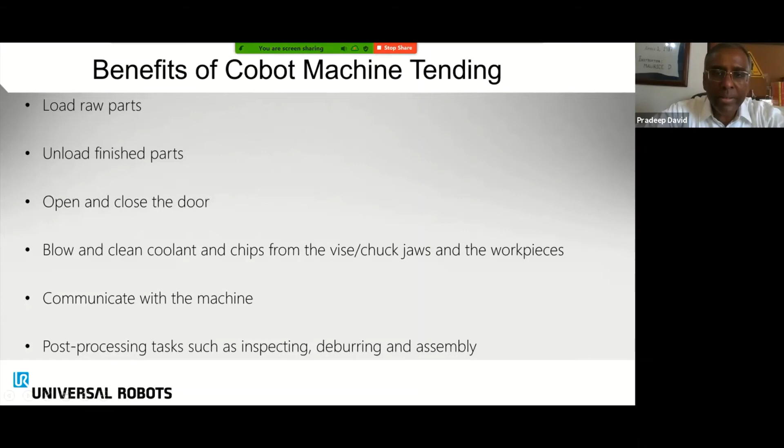And today they've become so successful, their quality has gone so high. Aurolab provides to Aravind Eye Hospital, but they also ship to 150 different countries. Their quality has gone up so much and their price has gone down so much that instead of firing people for cobots, they've hired a bunch of people because their business has grown so dramatically.

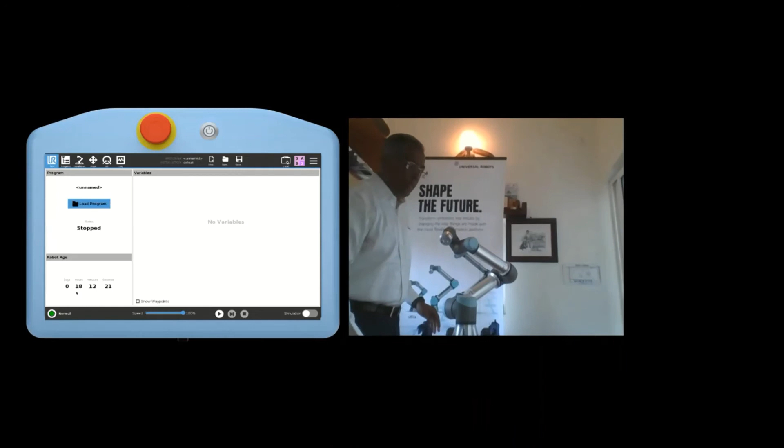Okay, thank you. So I'm now turning to the Cobot, the collaborative robot. In this case, I've got a UR5e, so it's 5 kg payload. And the teach pendant, you can see it on the left-hand side of your screen. This is the teach pendant.

So you can imagine that you are programming the Cobot now. On the top left of the screen, it says program, so I'm going to go to program. You notice that the tree out here is blank, there's no program in it, right?

So I want to basically move the robot from one location to the other to pick up parts and stuff. So I'm going to say move, okay, and it says move to waypoint 1. I'm going to assume this is the point where I'm going to pick up the part. My pro feeder is there, and I'm going to take the part and pick it up from here. This is waypoint 1. So I'm going to say set this waypoint.

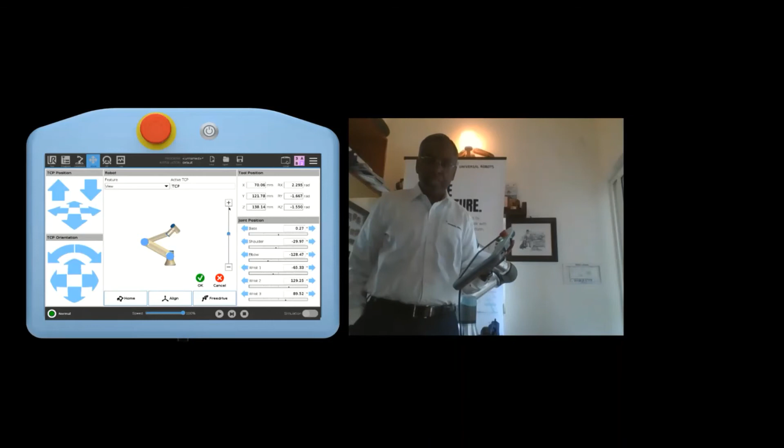Notice up here, it'll show the X coordinate, the Y coordinate, the RX, RY, RZ. So any point in space is defined by 6 coordinates, the XYZ and the θ1, θ2, θ3. That's what you see on the right-hand side. By the way, like any robot, you have these arrows. I can move it up and down on the Z axis, I can move it left, right, I can rotate it, all that stuff.

Okay, and I say okay here. Next, I'm going to say a next waypoint. Now, if this is your operator, you don't expect him to know X, Y coordinates and all that, right? So you would ask him to press this button. You see on the back of the teach pendant, it's a button called the free drive button. I press this free drive button, and now I can move the robot to any location I want to. It's that easy.

So your operator can see the part is here, and now I need to move it here. He moves it to waypoint number 2, and I say, okay, set this particular waypoint. Let me do one more waypoint as the drop-off point. Here's my machine, the machining has happened, and now I'm going to go to waypoint 3. Again, I hold my free drive button and say my drop-off point is somewhere here. Something very simple, you can move it to any location you want, and I say set the waypoint. So now I have 3 waypoints set, waypoint 1, 2, and 3.

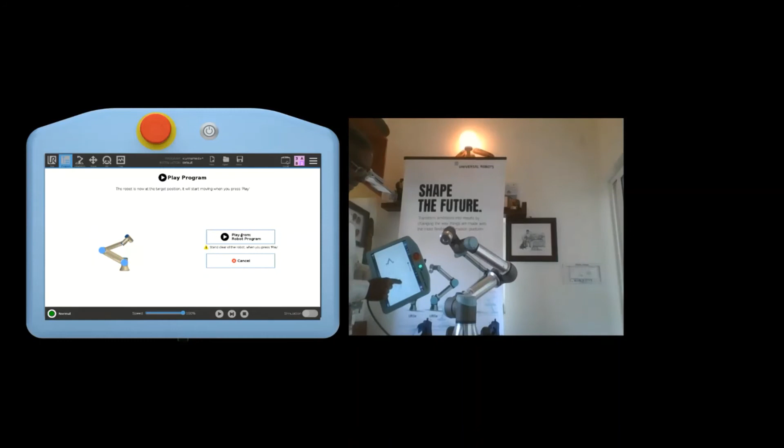And I can say, let's go run this program. So now it's going to say, take me to my first point, the original starting point, and the robot is now moving there. At this point, I say start the program, so it's going from waypoint 1 to waypoint 2 to waypoint 3 - the pickup point, let's say the CNC, the in-feeder, the second point, and the drop-off point. Now I'm just going to stop this and say, actually, I need to do a little bit more than this, right?

So at this waypoint, right after that, I'm going to say once you reach that waypoint, I want you to wait. I hit wait, and say wait for maybe 2 seconds. In your case, maybe it's waiting for a proximity switch input, seeing that, yep, I'm in the right location. So you would say wait for an input. You see one of the choices in the teach pendant is wait for an input. I'm just waiting for 2 seconds, and after waiting, I hit the set button.

So now I want to send a command to my gripper. My gripper will be a digital output, so I say set the digital output to, and which output? Maybe output number 4. I want to set it high. Simple as that, like any PLC, I've got one digital output.

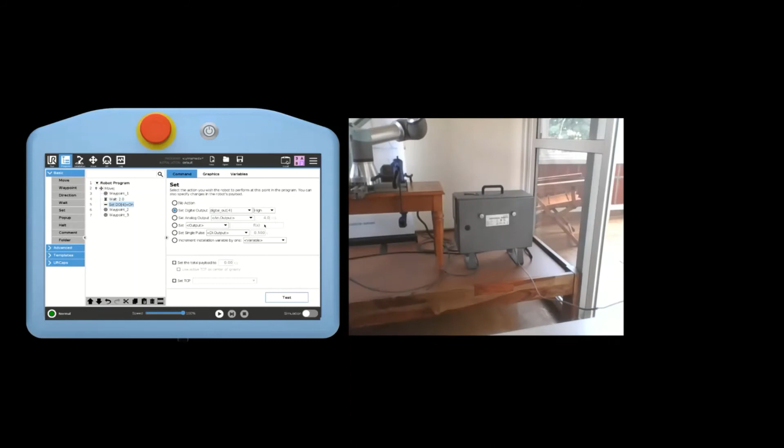Where is the PLC? You can see right here. That's all that comes with the Cobot. You've got one robotic arm and this PLC, or the control system. If I open this box, these are the yellow safety inputs, the gray is the digital inputs and outputs, and the green is the analog input and output. Down here is the communication ports, so I have a USB slot and an Ethernet port. You can see I'm connected via Ethernet to my computer, which is how you can see this demonstration going on.

Okay, so we close that. All right.

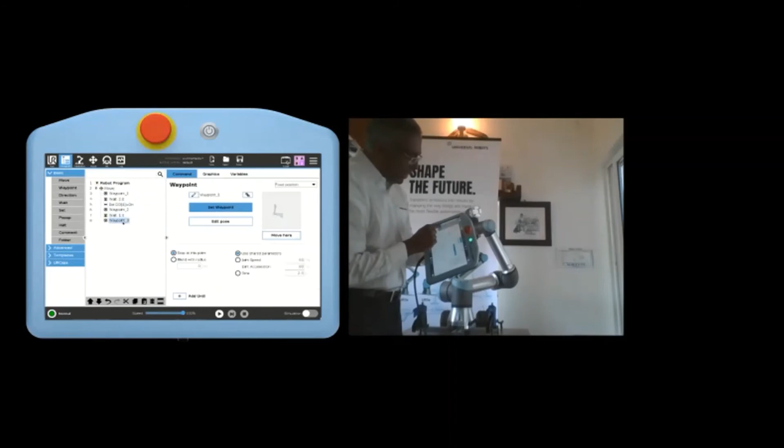So now we get back to the programming. I'm saying set the digital output to on. So we have set that on. Then I go to waypoint number 2, and I say wait there for maybe a second or so. Finally at waypoint number 3, again I do a wait for another second. At this point, I also set that particular output, digital output number 4, to low. In other words, I turn off the gripper. Simple program. You can see the ladder logic happening there on your screen.

And I say run, run the program. So it says okay, take me to my home position first. I hit this button, and now it's ready. I say go ahead, run. You can see it moves to waypoint number 2, and now to waypoint number 3, and you can see the program executing on the left window.

Your waypoint 1 waits 2 seconds, digital output on. How do I know if the digital output came on? I hit this IO, and you can see digital output number 4 on the top right corner. You'll see it coming on in a minute. Yeah, that digital output 4 came on, and that means the gripper is on, and now the gripper is off. I'm releasing the part.

So I think you understand now with this very basic programming that I've shown you, it's actually very easy to program. In just a few minutes, you've got the robot moving the way you want to, you've got an output coming on, you've got an input that you're looking at, it could be an analog input, that if I reach so-and-so height level or whatever, only then you turn on that input. So it's as simple as that.

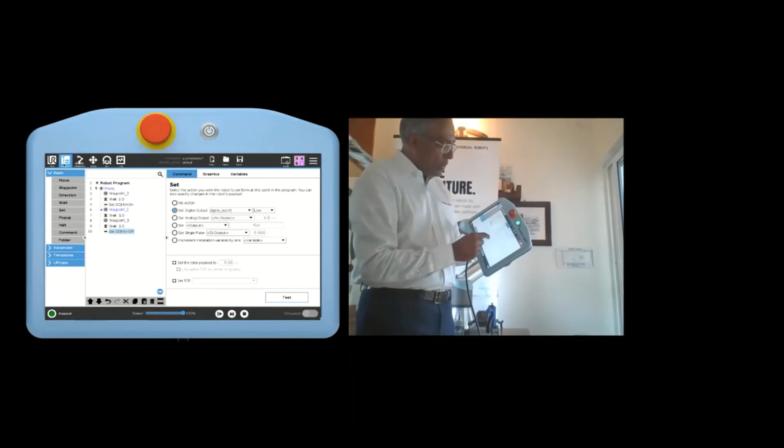Once again, I go back to program, and by the way, when this was running, let me run this again. I can also see the graphical view of this. By the way, on the bottom right, you can see I can run it in simulation mode. So if my machine is busy, I can run it in simulation mode, just in graphics and software, and then when I'm happy with it, only then run it on the machine.

So that's there. And then, by the way, the commands are very simple English language: halt, comments, folders. If I go to advanced, you see it has loops. Now if I want to get into more sophisticated programming, I've got sub-programs, maybe I've got child parts and I want to have nested loops. This gets to be a little bit more programming intensive. We wouldn't expect your guy on the shop floor to do it. What I did is exactly what the guy on the shop floor would do.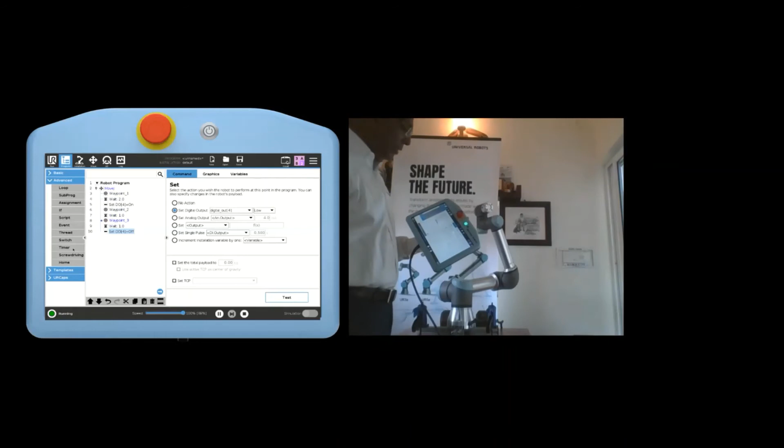Scripting - for example, IIT Kanpur is using this Cobot to do bin picking, so they need to do a little Python programming, scripting to actually do a little high-level stuff. That's available. By the way, for troubleshooting, you just click on this log and it tells you what went wrong.

So let's assume that by accident somebody contacted my robot, came in contact with it. What happens? In this case I went into default mode, but typically what would happen is normally you would not go all the way out of the program. You would go into what we call protective stop, right?

I'm just working in the house, so you notice I've got a very flimsy stool that it's sitting on. It's not grouted, so I cannot put much force on it. But typically when you touch a robot, it'll come to protective stop. You remove the protective stop and you just continue running from where you left off, okay?

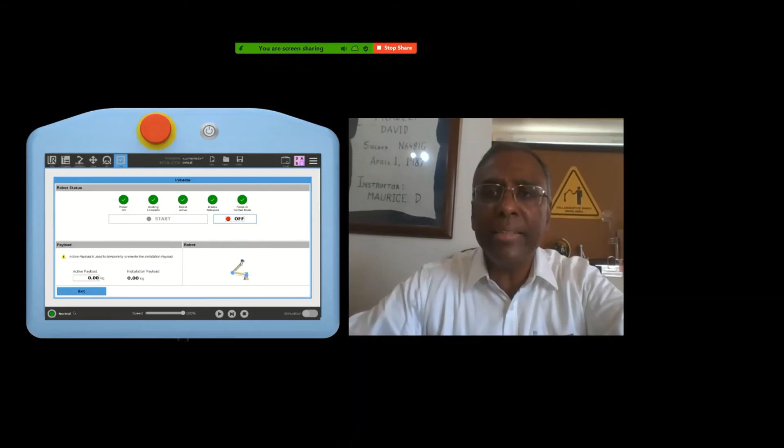So, hopefully that's shown you very quickly how to program a Cobot. By no means is that the full thing, but I think it gives you an idea that yes, I can do this on my own if required. So let me turn this off now.

Okay, so I should be back in the meeting now. I'm sorry, is the video available now? Can you see me now? No, yeah, it's fine. Oh, it's fine. Okay, okay, thank you.

All right, so getting back to here, let's see, maybe some more questions have come in. I'll take a couple of minutes to see the Q&A. You are using Cobot already for pre-painting - okay, this is already answered. I think many questions are being answered by my colleague, which is great, so I won't spend any more time on that - welding applications, etc. Okay, so all the questions are being answered. Great.

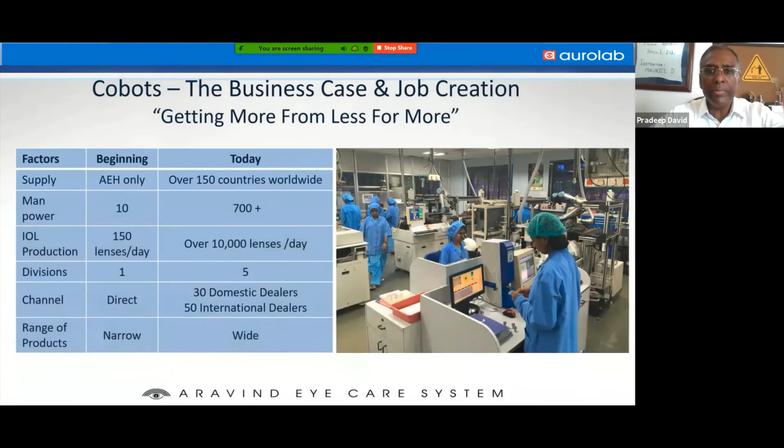So if you happen to have an R&D facility, we always recommend one to be purchased immediately by them, because when Bajaj bought their first robot back in 2011, they bought one for the R&D center. The very next year, they bought 23 Cobots from us, because they realized how easy it is to use, how flexible it is, and how many different things they can use it for. So we always recommend, if you have a smart engineer as an MSME, give him one of these things as a tool, and you will see what kind of magic he can work on your shop floor, because you know your shop floor better than anybody.

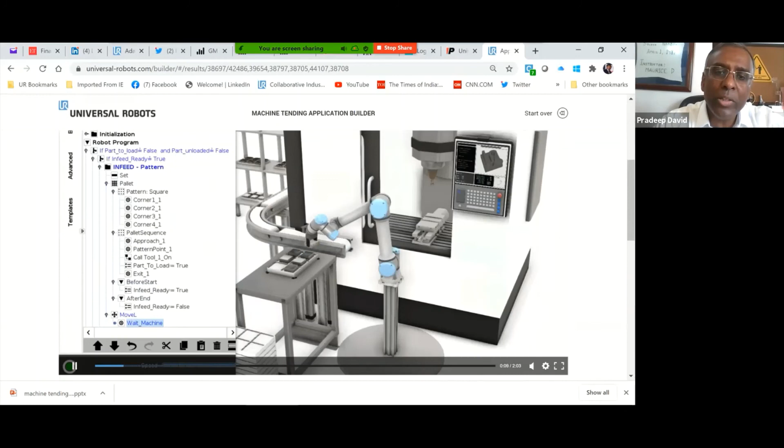Very quickly, right on the web, my application is designed. Because you told me I need a pattern for the input, it's created a pattern. You can choose 6 inputs, 120 inputs, whatever it is. It's got a Y-shaped gripper, which is a dual gripper, and it's got a fixed output point, only one output point.

So now it loaded the part and the VMC is doing its thing. Now I need to go pick up the part that's machined, and at the same time I load the unmachined part, come out and load the output on a fixed point, maybe a fixed conveyor, and that goes out. So it's a fixed point. I can see the animation is developed, and on the left-hand side my entire program is developed.

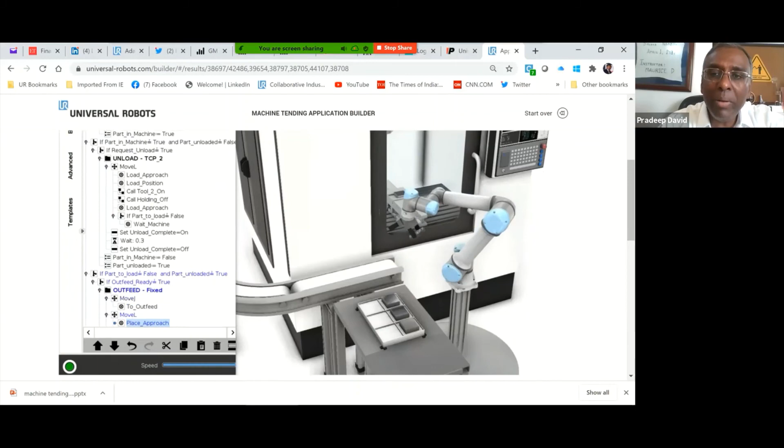I can take this program, download it into the robot, and the robot will work. Now you may have to do some changes, but you saw in a matter of 5 minutes an entire application for machine tending has been built for you. It can't get much simpler than this. Of course there are many variations to how you do it, but to get started, believe me, it's this simple.

Please don't put a camera and complicated things to start with. To start with, do something simple. Have a fixture that brings a part in at the right point, simple like this, and you will get very quick success. So hopefully that was clear, that's called Application Builder. I'll move on.

You may say, what kind of grippers do I have? There's hundreds of types of grippers, actually hundreds. And we have this program called UR+. Notice pneumatic will cost so much, pneumatically intelligent a little more money, electric even more money. So what kind of thing are you looking for? You can choose, that's your choice, 21 variants of this particular gripper available.

So we have this program called UR+, where partners develop different grippers, different cameras, different types of things for the robot. We post it on our website. It's got nothing to do with us, we just test it. You can buy it from that particular vendor.

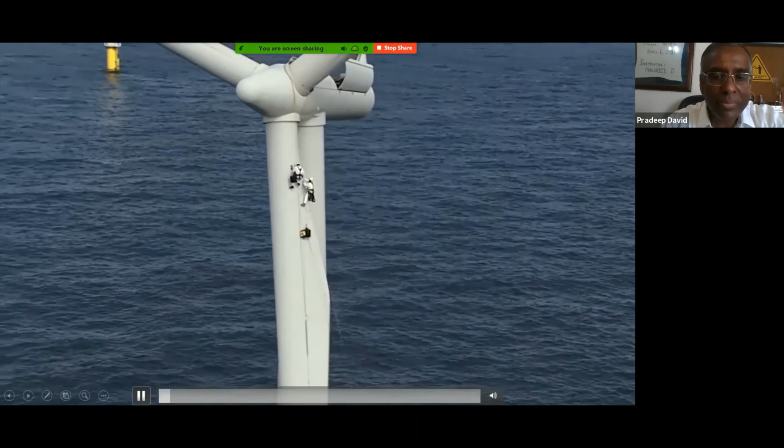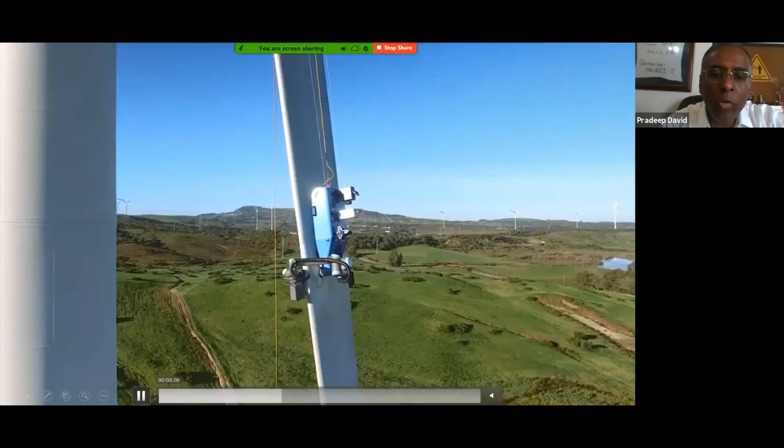Understand that a Cobot is nothing but a tool. It's not a robot. Don't think of it as a robot that's there to load your CNC machine only. You can use it to load and unload your CNC machine. You can take it to another location, to another CNC machine at the same shift. Think of it more like a drill - I take it where I need it, use it, and then bring it back. If you think of it this way, your ROI calculation will come to less than 6 months. And it's a technology you cannot afford to miss out on, because many people are using this now to get that competitive edge. Don't think of it as just something I bought for that CNC machine and that's all it's going to do, because it can do a lot more. Think of it as the next part of your toolbox.

Okay, so we'll end now with a couple of videos. Here you can see, obviously we'll end with a VNC. And on the left-hand side, we'll start this one also.

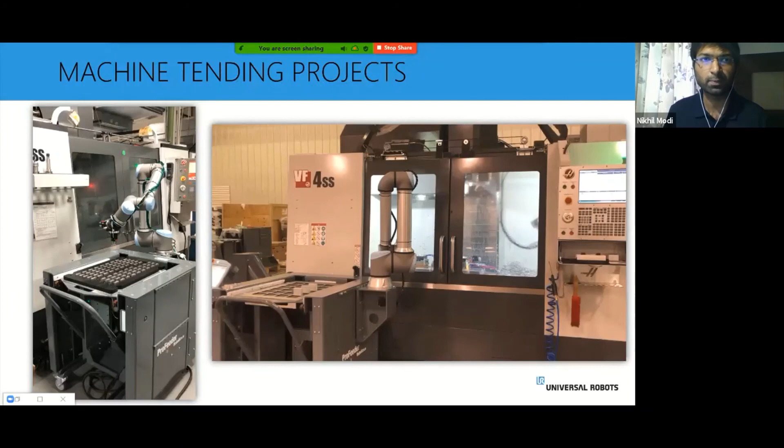So Ms. Sneha is asking if the emergency stop is provided. Emergency stop is provided, yes. So if you see, I can't, my camera is off now, but yes, on the teach pendant, there's an e-stop, okay? So yes, you have an emergency stop out there.